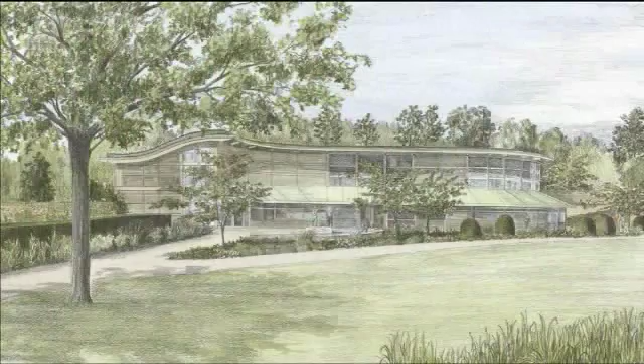The Royal Horticultural Society's new learning centre and library at Harlow Carr Gardens in Harrogate has been designed to have minimal impact on both the gardens and the environment. Awarded grant funding from the Department of Energy and Climate Change's Low Carbon Buildings programme, it'll be a flagship development demonstrating just what can be achieved by responsible planning and design.

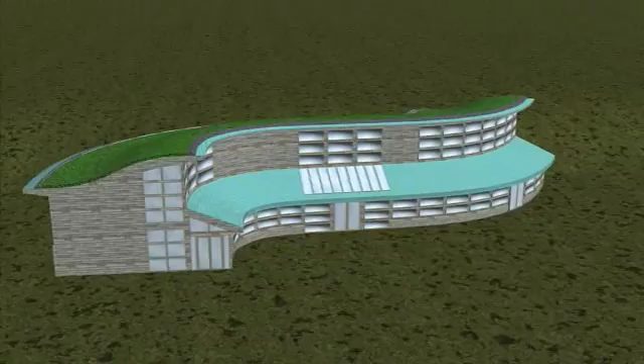With a range of low-carbon technologies, it'll save around 15 tonnes of carbon dioxide a year. That's equivalent to the total energy demands of 3 houses. The building will exploit the surrounding landscape and take advantage of passive heating and cooling. The facade will be open to the south, and the north side of the building will be partially buried in the slope of the site. Areas of solar shading will be used to prevent overheating.

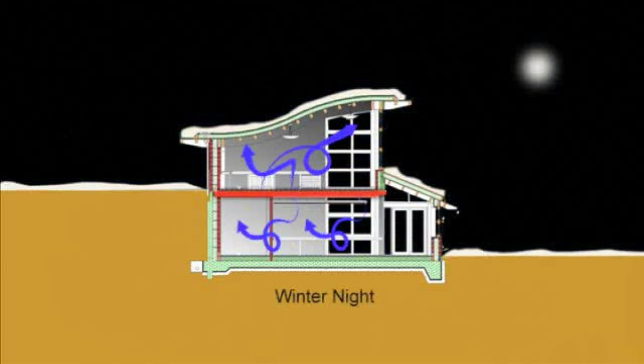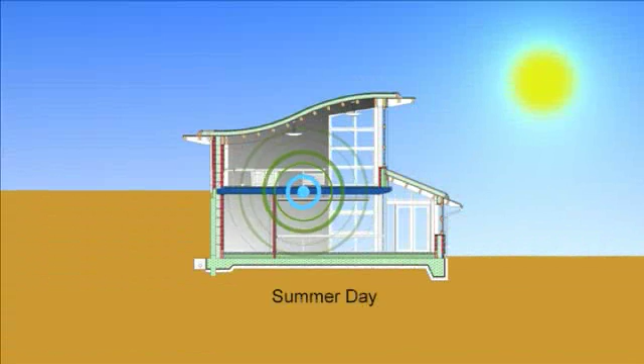During the day in the winter, the building will store heat from the sun as well as that generated by its occupants. High thermal mass and a super-insulated fabric mean it will retain heat overnight. In summertime, this will work in reverse, storing the cool of the night and discharging it in the heat of the day. During warmer periods, the building control system will actuate free cooling by opening windows and dampers.

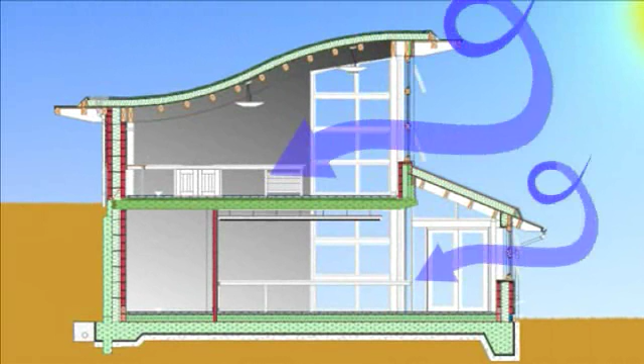The natural ventilation system is driven by the prevailing wind and buoyancy effects. Windows will open automatically whenever the internal temperature exceeds 22 Celsius or when monitored carbon dioxide levels become too high. Occupants will also be able to open the windows manually.

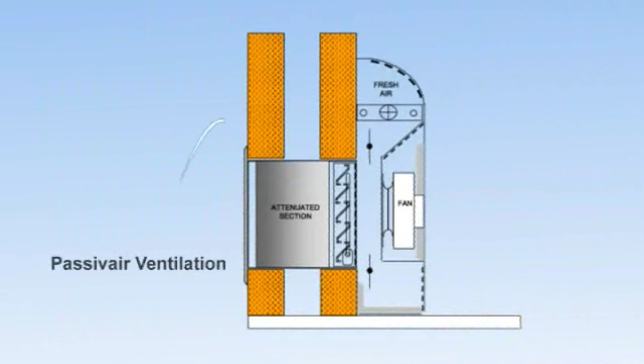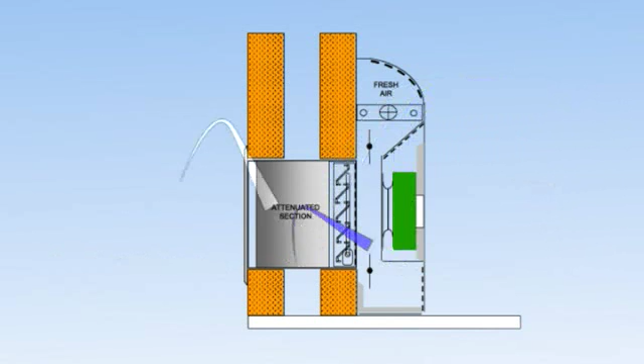Ventilation will be boosted by a mixed-mode system. As carbon dioxide levels rise, purpose-built Passivair units will allow in cool air. If this doesn't reduce the carbon dioxide levels, a fan will boost the flow. The windows and Passivair units will be controlled by the building management system. The building's sedum roof not only provides low-maintenance insulation, it also promotes biodiversity.

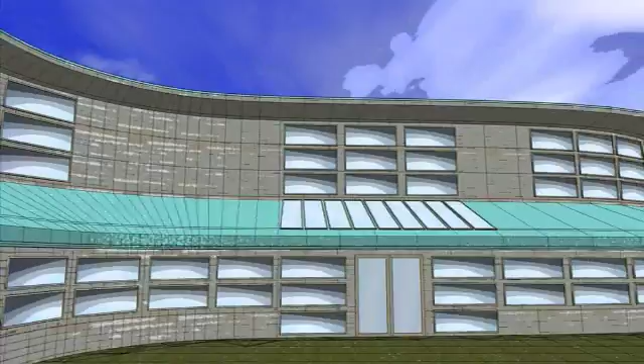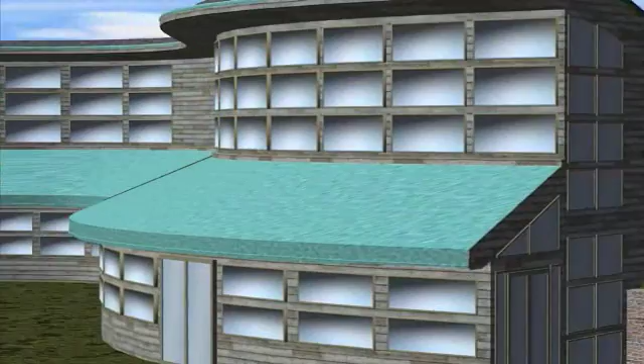The fabric will be super-insulated and constructed from recycled aggregate concrete blocks, timber and unfired clay bricks. There'll be 300 mm of Kingspan insulation board in the roof and 250 mm of mineral wool insulation in the walls. The floors will contain 200 mm of polystyrene and the windows will be triple glazed. The building is designed to achieve an air tightness level which is less than a third of the current building regulations. Underfloor heating will evenly distribute warmth, while the expel air units also contain heater batteries to avoid cold drafts during winter.

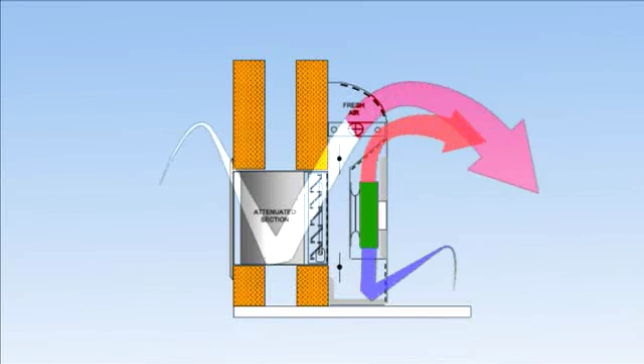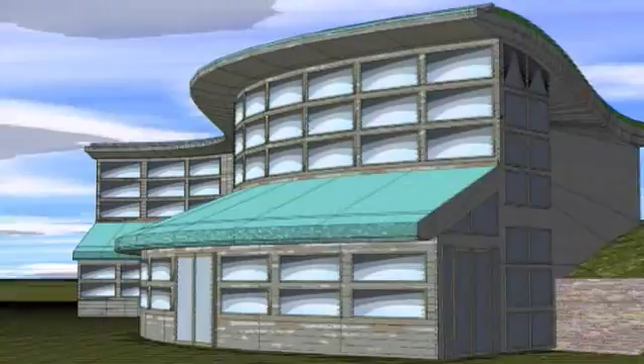A 22 kilowatt ground source heat pump will provide the main space heating. It will circulate a mixture of water and antifreeze through vertical pipes in the ground. This will absorb heat before transferring it into the building's underfloor heating pipes. To ensure that only areas in use are heated, the building will be separated into 14 zones. Each zone will be served from a nearby underfloor heating manifold and controlled by the building management system.

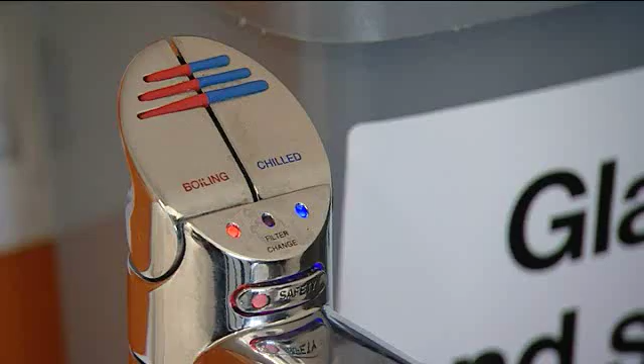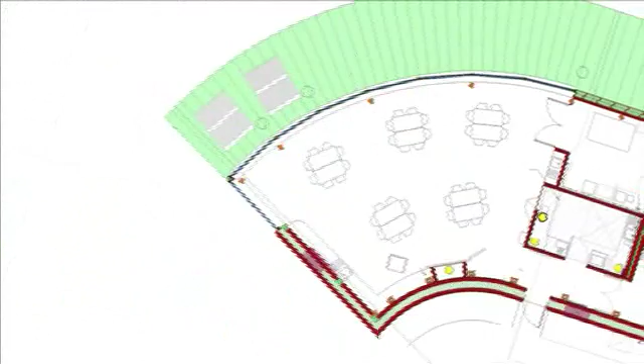Demand for hot water isn't high, but what is needed will be provided by a mix of solar thermal, ground source heating and an electric immersion. Up to 60% of the hot water will be heated by 8 square metres of evacuated tube solar collectors. The use of mains cold water will be monitored and controlled via the building management system. When the building is unoccupied, solenoid valves linked to movement sensors will isolate supplies to toilets and sinks.

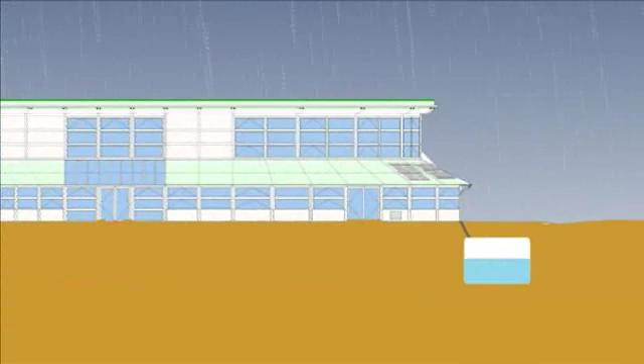Cold water for toilet flushing and plant irrigation will come from rainwater collected from the copper roof. The collected rainwater will be stored in a large tank and could provide up to 30 days of supply. An ultraviolet filter will be installed to ensure guidelines for using rainwater in public areas are met.

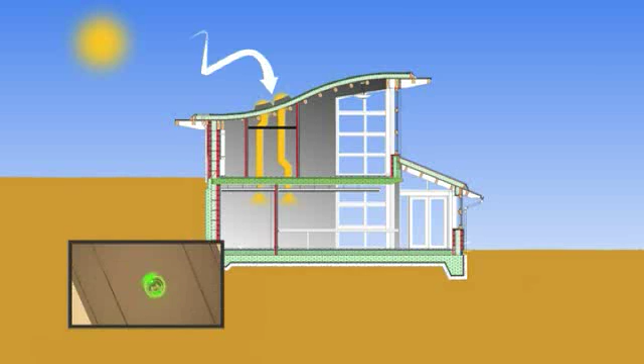The building has been designed to encourage the use of natural daylight. This means many well-placed windows and sun pipes installed in areas like corridors. All lights will be either low-energy fluorescent or discharge. Fluorescent lamps will include high-frequency control gear for efficiency, dimming and occupant well-being. Daylight and movement sensors will also control the lighting automatically.

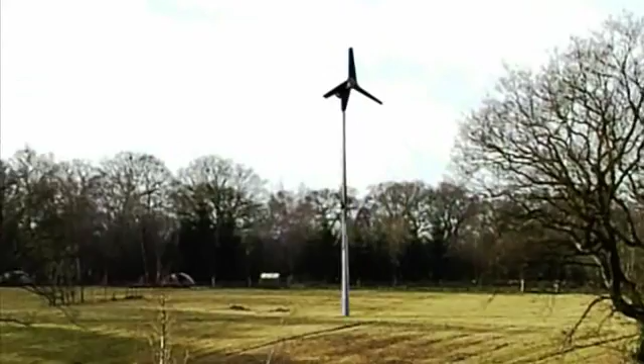The building's electricity will be reduced wherever possible, with the remaining requirements supplied by wind turbine. Building services, together with the renewable energy technologies, will be controlled and automatically managed by the Building Energy Management System. The system will also allow building users to see live energy generation and consumption data on a public display.

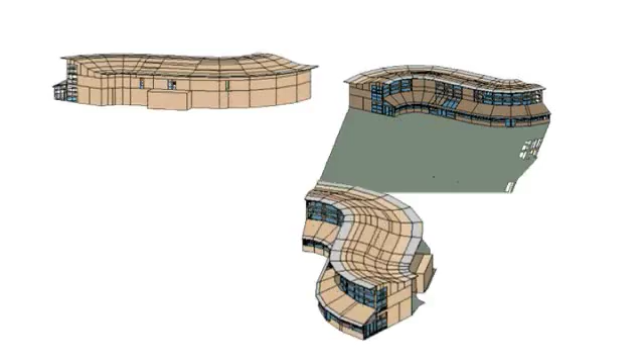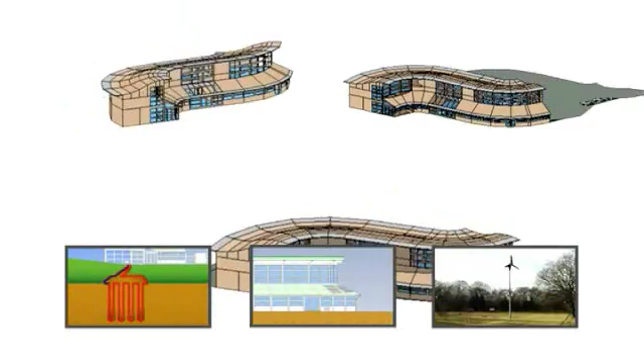This design uses every trick to reduce energy need to a minimum by orientation, daylighting, energy efficiency technologies and a high level of control. The building's energy needs will be covered by the heat pump, solar panels and wind turbine. With the emphasis on maximising the use of existing natural resources and minimising the impact on the environment, Harlow Carr's new learning centre and library will be an exemplar of sustainable development while demonstrating a zero carbon footprint.